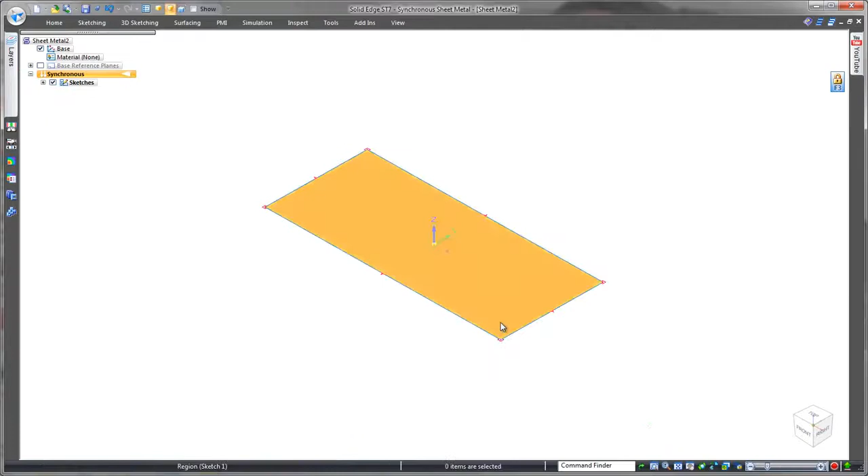Starting from a blank space, we'll sketch a rectangle roughly the size we want and pull that into a sheet metal gauge. For a couple of flanges at either end, we can simply pull these out too. Let's do the same thing again to add a couple more flanges.

And all the time, watch how we're working with our geometry rather than clicking through commands. Design is the focus here, not the software.

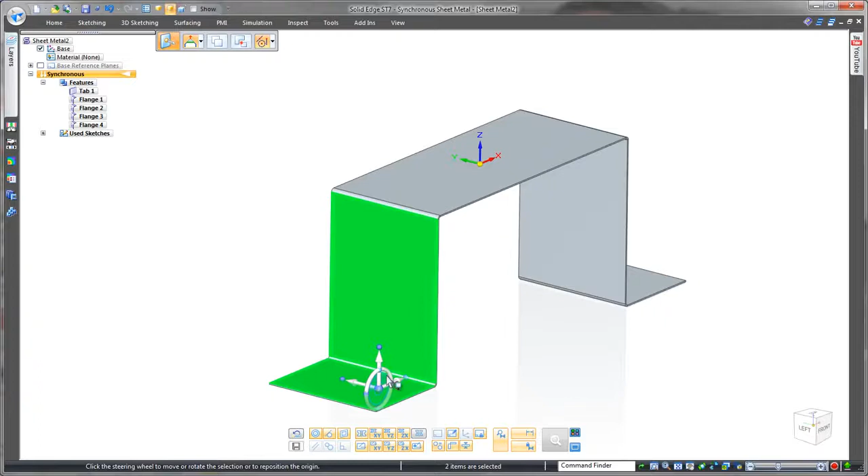Oh, and the design here should be for these flanges to angle out. No need for a delete or undo. We can use what we call the steering wheel, our main control in synchronous technology, to angle. But not both sides, I don't think. No problem, we'll just tell these faces to be at right angles. Just because we created these symmetrically doesn't mean there's history-based design intent tying us down, like you get in most any other CAD system. Easy.

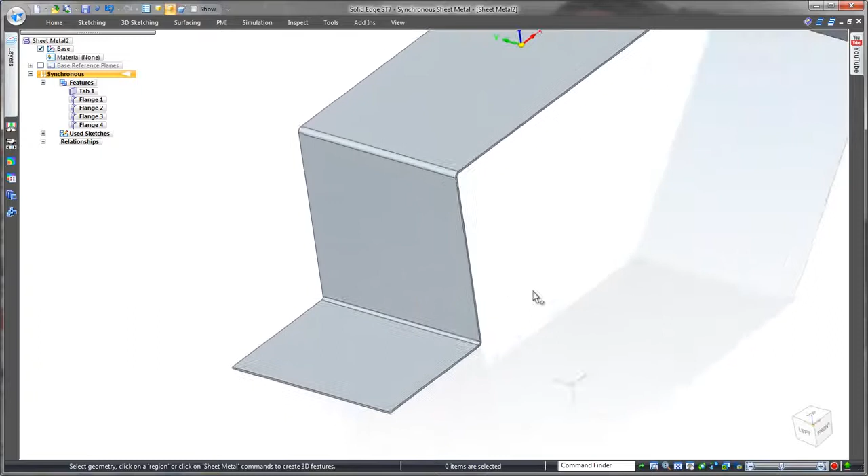Okay, next up we need a guide for the USB block that this spring clip will hold. A bead would be ideal, and that's as easy as sketching a line where we want it to be, and then choose the size and shape of our bead. This one I used in a previous project should work just fine.

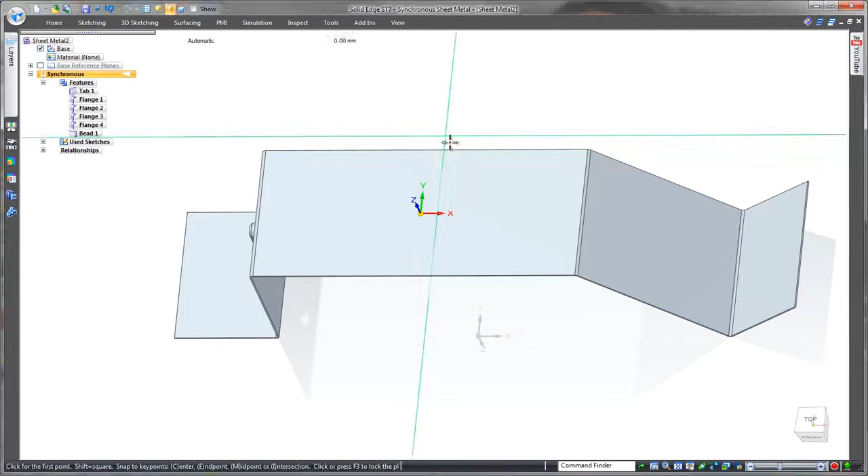Next, let's create a cutout to go through all three sections of the sheet metal on the right hand side. Oh, and check out this method as an even quicker way of sketching shapes.

Nice. We'll centre that up, and although this is a concept, I do know this needs to be 16mm in width, so we'll tie that down.

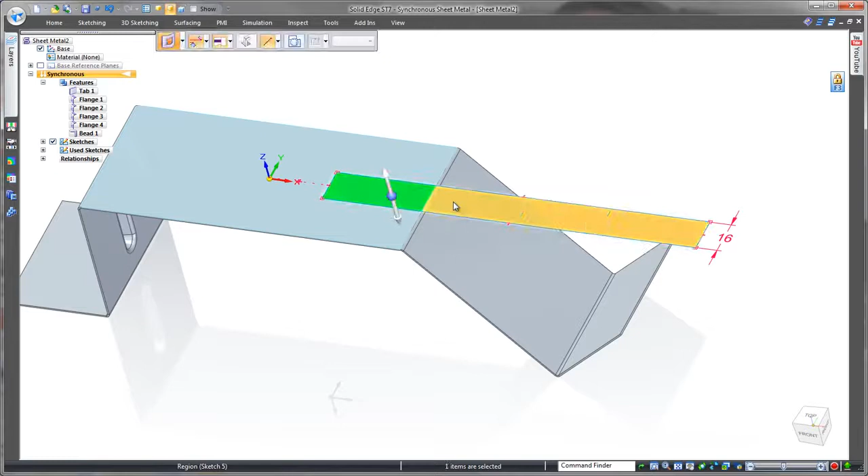Another simple drag, this time to remove material, but we want this cut to be created before the part is bent into shape. No problem, Solid Edge can flatten the part on the fly before cutting.

Very nice. For the retaining clip that we need, let's drag out a couple of flanges here and angle them both in. Same process as before, pull to create, and then the steering wheel to angle.

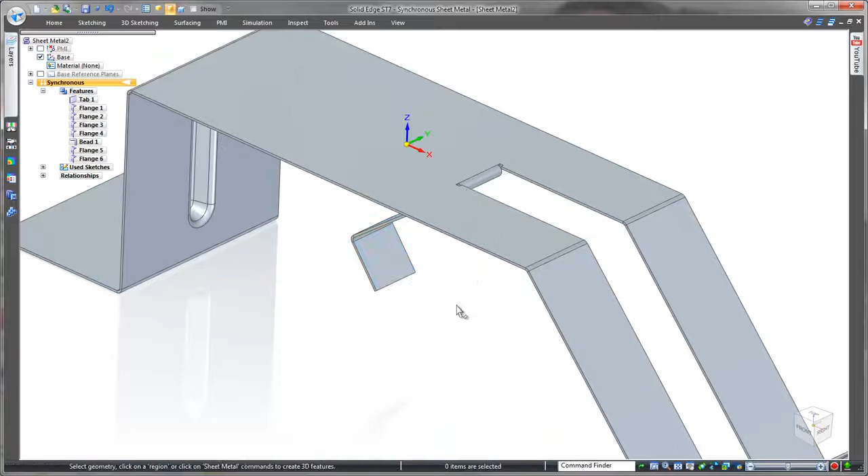We also need a sidewall to contain the connector block, so let's add another flange. But the material needs to be on the inside, and a partial flange, not a full one.

Great! Along with the USB block, this spring clip needs to clamp a fuse holder. We'll pull out another partial flange, and then let's mirror this across to the other side.

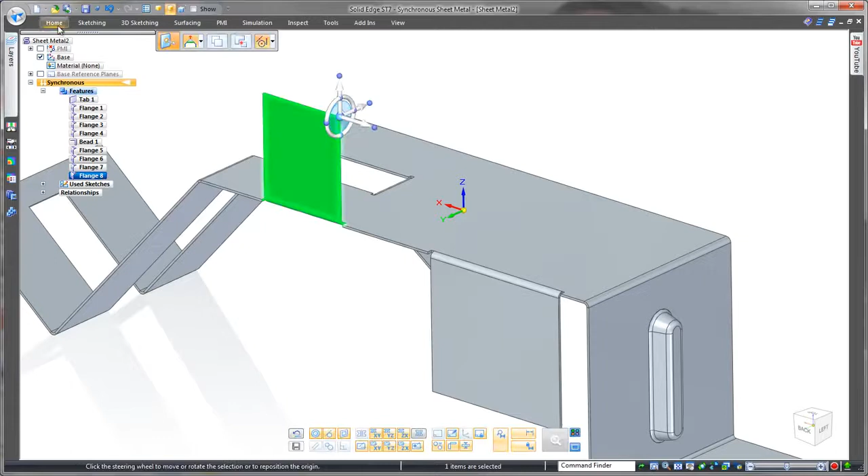Oh no, we've made a big mistake. The design brief clearly stated that this top sheet metal piece needs to be angled. I completely forgot. Remember that this was the first piece of geometry that we created. Everything else is built on this.

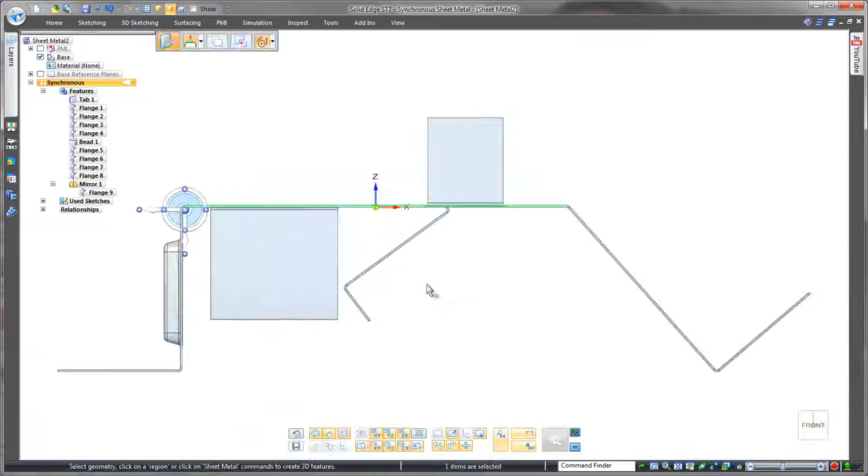But also remember we're using Solid Edge with synchronous technology. Check this out. Steering wheel to the rescue, simple rotate, no drama.

Let's get back to working on the clamp for the fuse holder. Remember we mirrored this, and notice along with everything else, this has been added to a feature tree. Yes, it's direct modelling, but there are still features to work with, like in history-based CAD. The best of both worlds with synchronous technology.

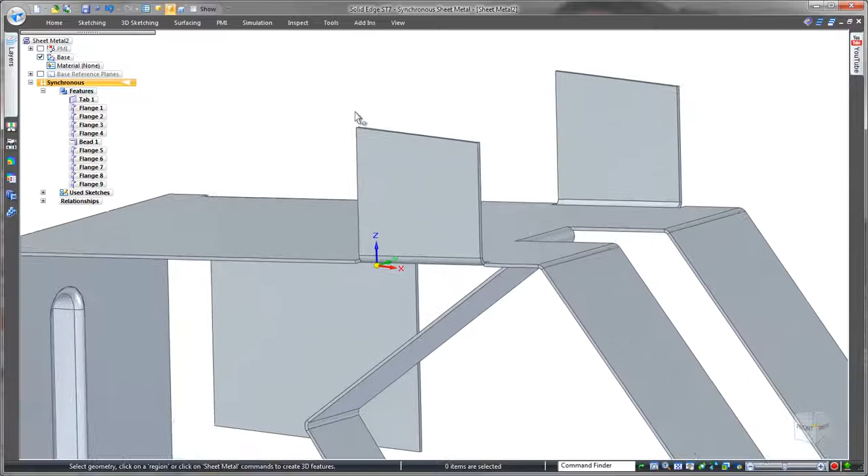That means we can edit the feature, breaking the link so that we can work independently on one side. And now we can add the jog that we want on this flange. Same process as the bead here, just a simple sketch line, and then apply the jog.

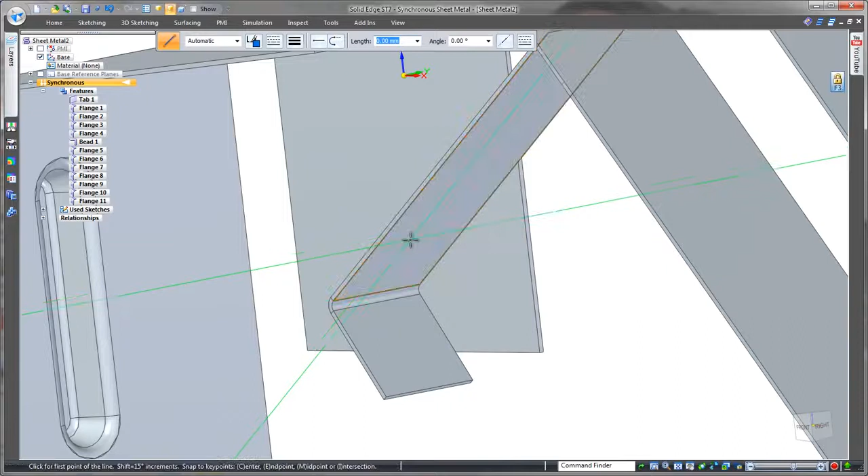Let's do the same for our retaining clip. Again, same process, simple sketch line where we want this jog to be. And then apply that jog, dragging it out into position. Easy.

Finishing up on our concept, let's get rid of some sharp edges by breaking corners. Nice and quick, click and go.

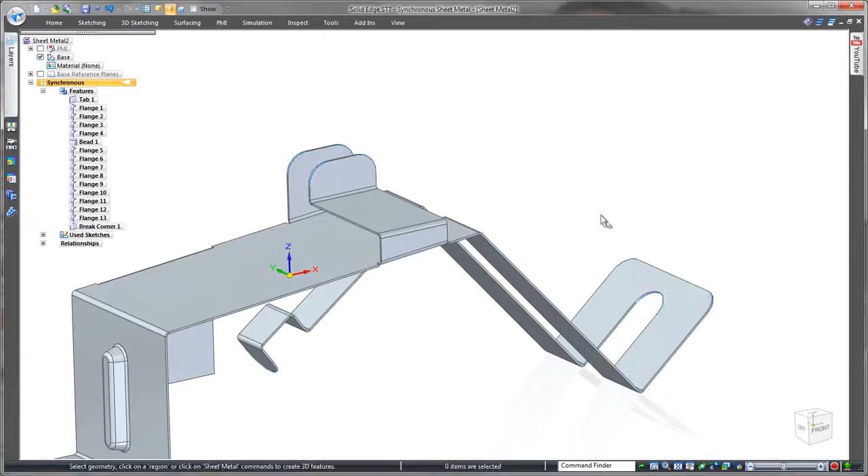And finally, we were briefed to include a hook to mount the whole spring clip. For this, let's push in the width of that second flange we created. And let me just repeat that, the second flange we created. No need to worry about the order that this was modelled, we're free to make this change.

And then let's use a hem to create the hook. Choose the right size, and done.

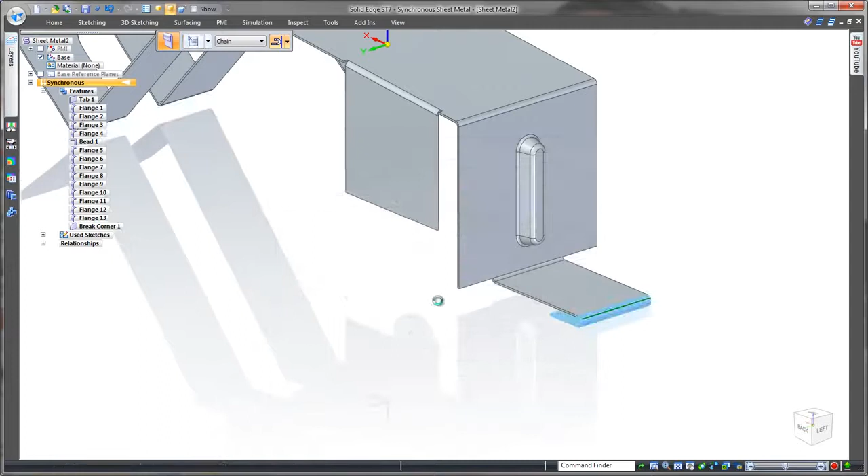So in a short amount of time, we were able to throw down this pretty complex design, working directly with the geometry rather than in and out of multiple CAD commands. And that's how it should be, no? Design the focus, not the software.

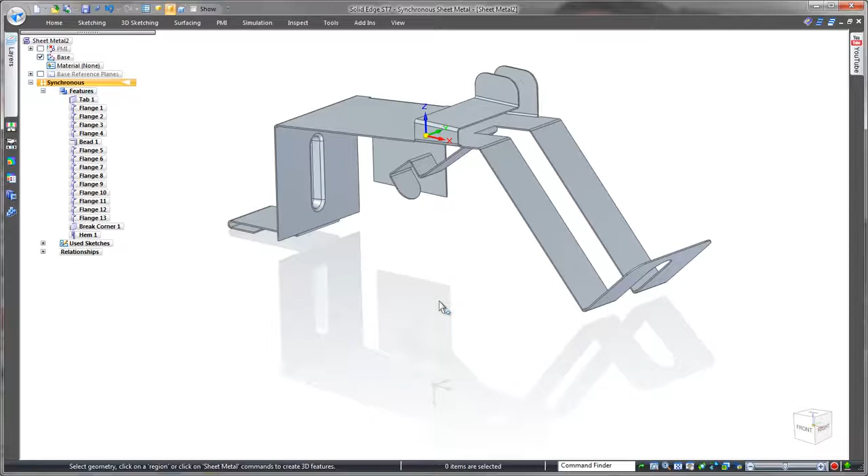And you'll be happy to know that even if you don't create sheet metal components like we had here, you'll still enjoy the same rapid workflow. Minimal sketching, minimal mouse travel, easy push and pull modelling, and importantly, no need to worry about what order should I do this in. The flexibility to change your mind at any time. That's synchronous technology in Solid Edge. Design better.